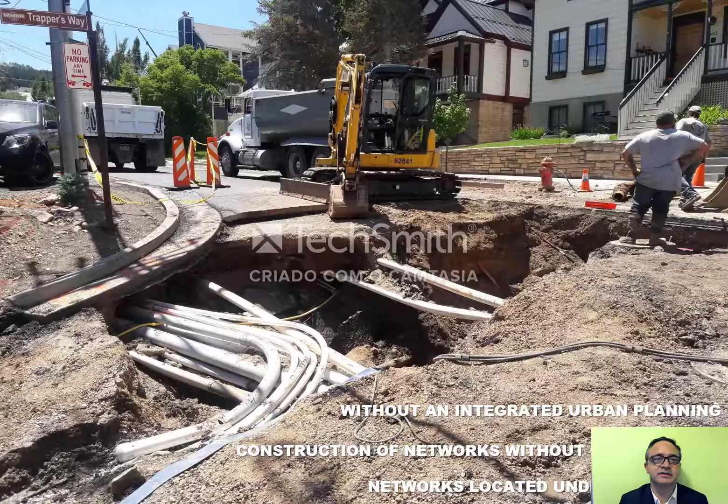The research motivation was based on the high cost of construction and maintenance of infrastructure networks, accidents, and the great environmental impacts caused by these works, mainly due to the implementation of networks under the streets, causing the demolition of the pavement to maintain the networks.

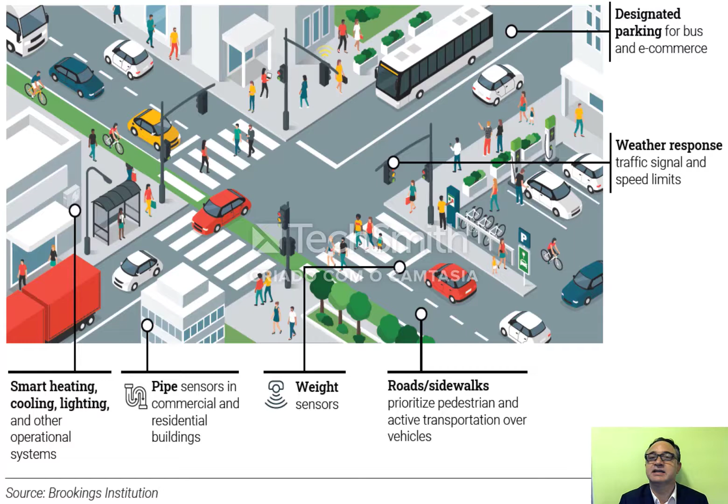Cities are growing and need more and more efficient, resilient, and sustainable infrastructure. Only in the United States, demand for infrastructure exceeds $2 trillion over the next 10 years.

But today, our infrastructure is designed and built without integrated planning. We have several problems with these systems around the world. Only in the United Kingdom, 7 billion pounds are lost every year in street works.

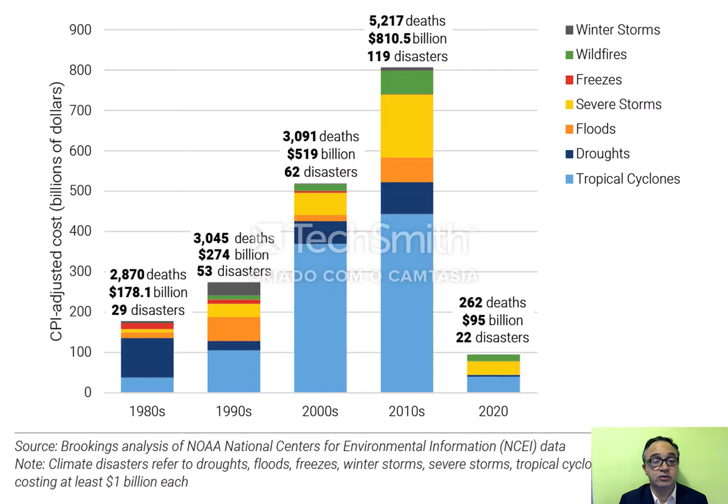We need to rebuild infrastructure. We propose for the 21st century a focus on integration, intelligence, and climate resilience in a multi-trillion-dollar infrastructure market.

Issues related to the COVID-19 pandemic changed the concepts, mainly of remote work and study, placing communication and energy networks as crucial for this moment.

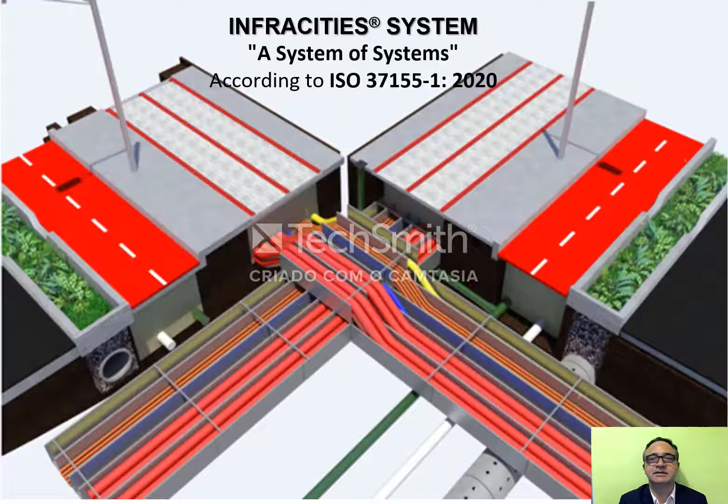So the solution is innovation, and I would like to present InfraCities System, formerly InfraDias, the next generation infrastructure and sustainable mobility for smart cities, the result of applied research in the area of sustainable infrastructure.

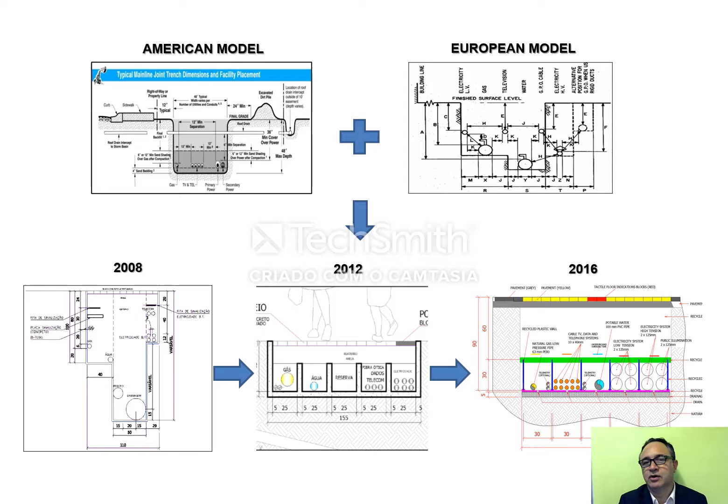The research started with the concept of urban infrastructure networks, developed using an American model during research at Texas A&M, and later a pilot project was built and tested in Brazil with the developed model called InfraCities, which will be presented now. InfraCities removes all facilities from under the streets and organizes natural gas, telecommunication, water, power lines, sewer, and drainage.

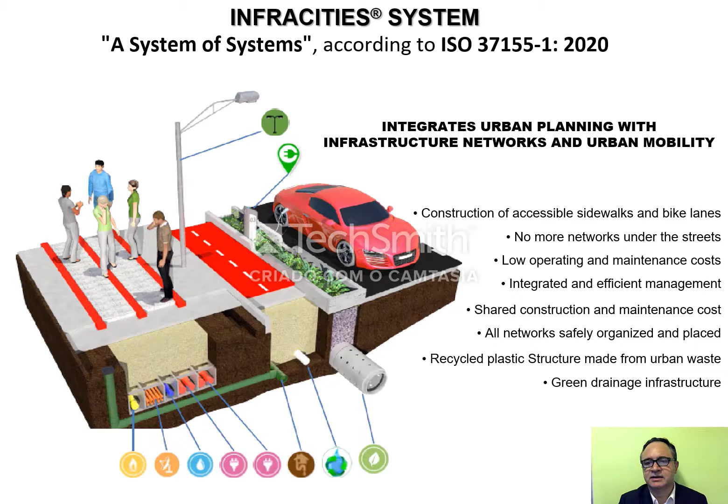These are placed under the sidewalks and bike lanes in a recycled plastic bay made from urban waste, in an efficient and safe system, transforming plastic waste into an efficient, safe, and sustainable infrastructure.

We built and tested a pilot project for 2 years in a technological park in Brazil with successful results, presenting a reduction in construction costs by 30% and a 70% reduction in maintenance and operation costs.

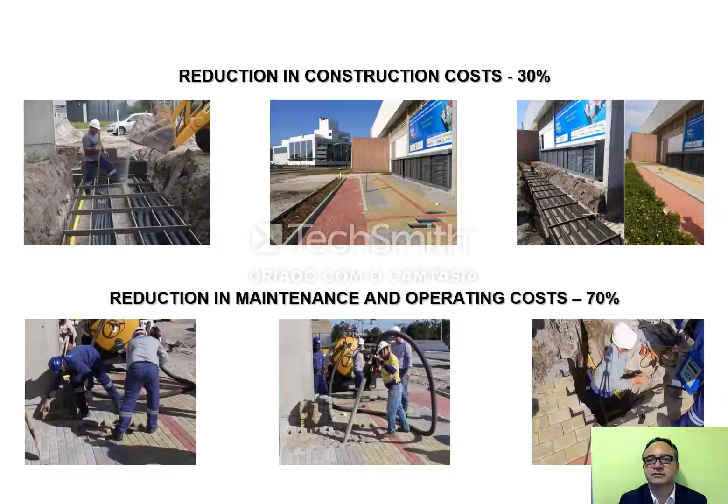The system was born integrated with BIM concepts, aiding the advent of a sustainable construction system for intelligent infrastructure, with the possibility of enabling BIM technologies for the next generation InfraCities digital twin, adding even more value to projects from its conception to its operational phase.

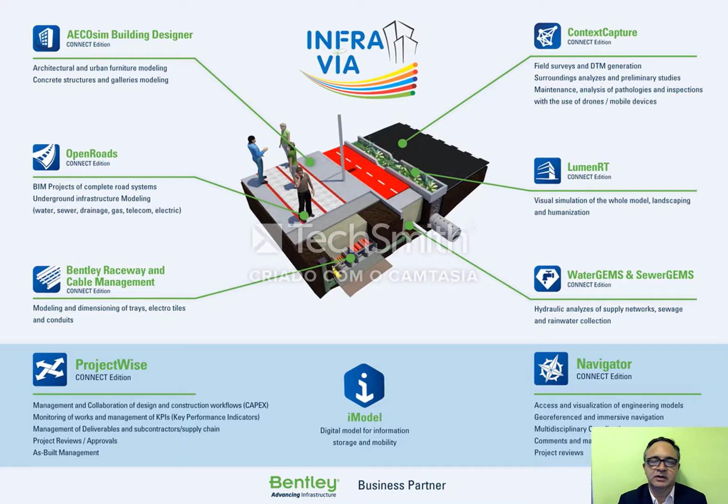It's important to show start to finish of this project. The construction process starts with the opening of a trench about 1 meter deep, and then we put sand and compact the ground with water.

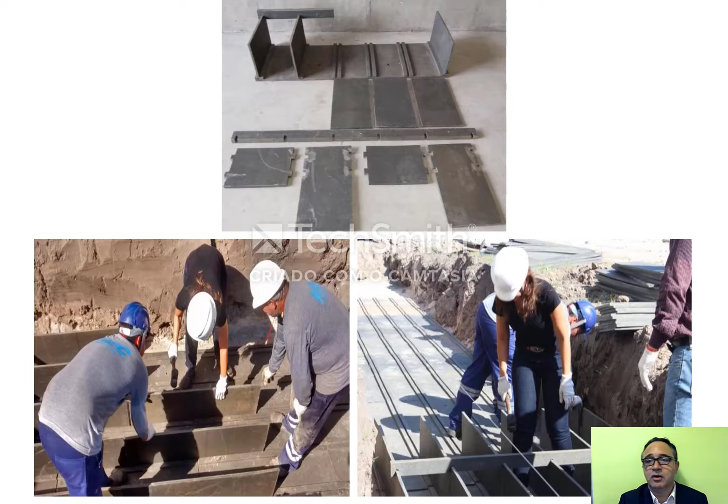Then comes the assembly of the plastic structure, which is all snap-on, not requiring special tools. Interconnection boxes for consumer networks are also easily and quickly fitted to the structure.

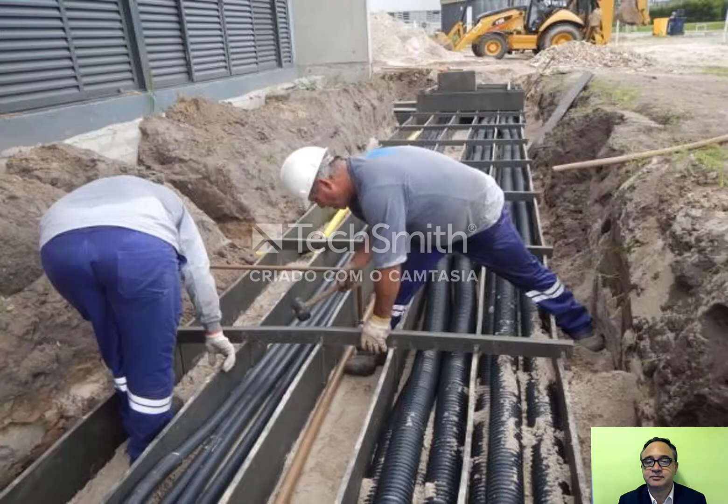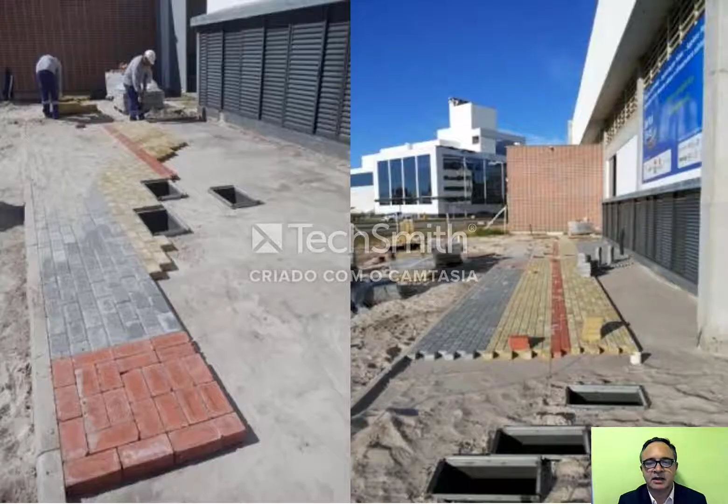This point is very important, especially for removal during maintenance. It's very easy to maintain this structure. The paving is done with interconnecting concrete blocks to facilitate future maintenance.

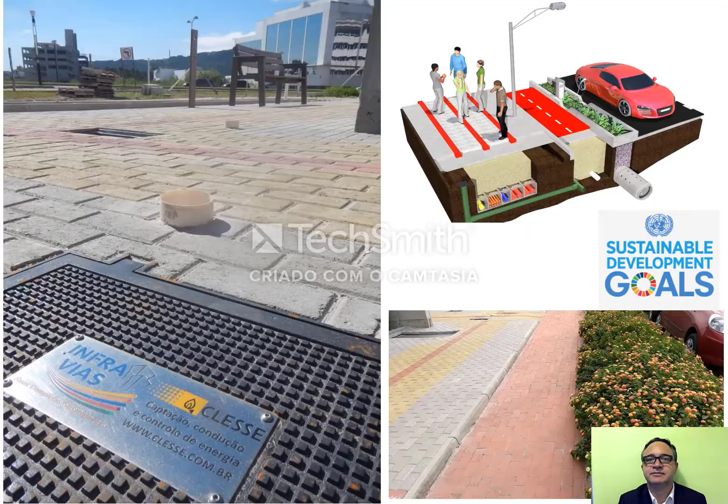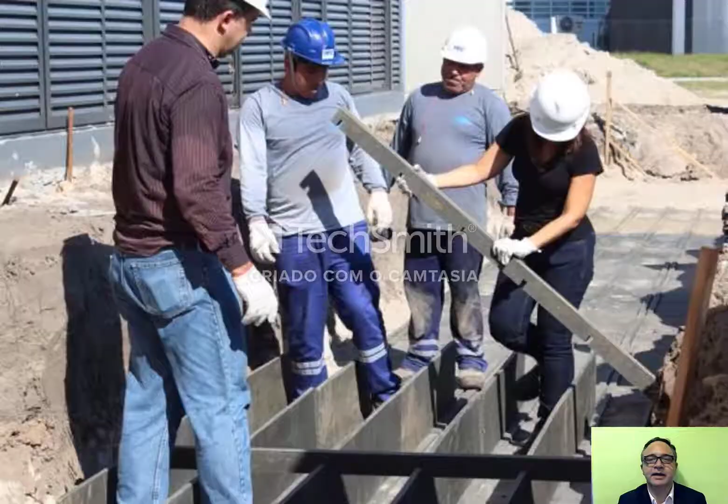The process presents a standardized, fast, and efficient construction in line with the United Nations Sustainable Development Goals, a very important point today. Without special construction equipment, it can be built in any city, on any road, of any size — for example, in downtown New York or in a small city here in Brazil or Asia — creating a global scale for this system.

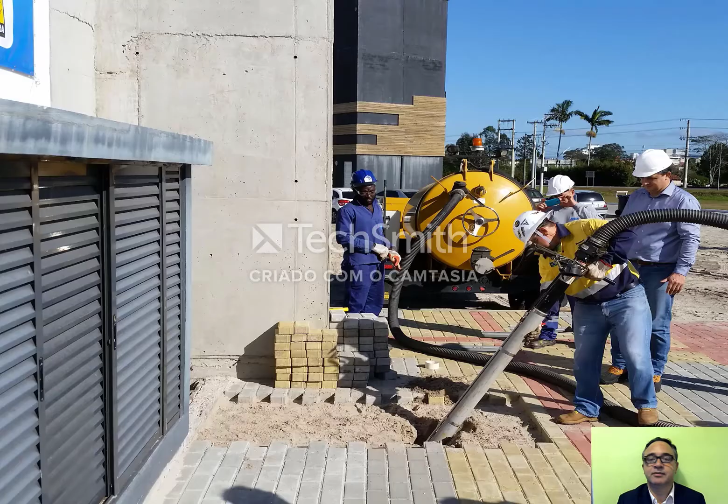To perform maintenance, it is only necessary to remove the interconnecting concrete blocks, remove the covering sand, and subsequently maintain the facilities. After the intervention on these networks, the same material can be reused, avoiding the generation of waste and the use of new materials. This is an important point for sustainability too.

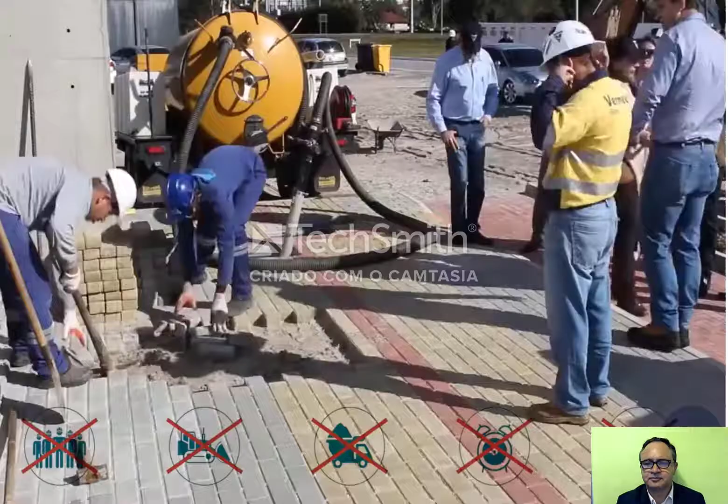It presents efficient and sustainable maintenance without demolition of the pavement of streets, no interruption of traffic, no generation of waste, and no new material consumption. This is a great benefit for nature.

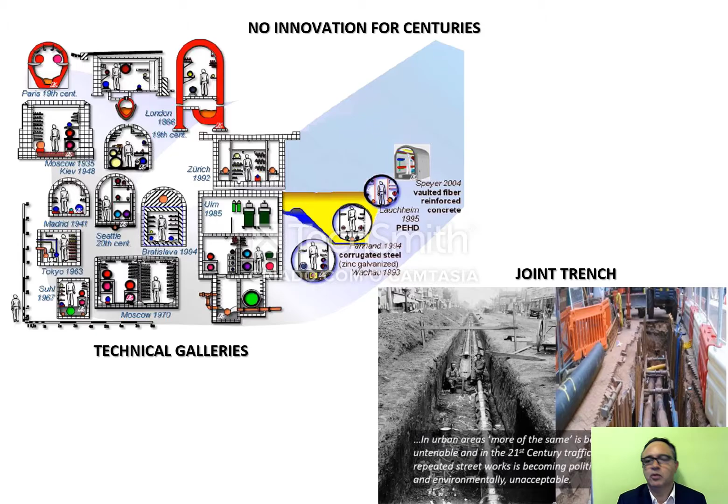The system presents great advantages when compared to technical galleries, which have high construction and operation costs, and joint trenches, which have low operational safety, in line with the most modern standards on sustainable infrastructure for smart cities — for example, ISO 37155, the framework for integration and operation of smart communities infrastructure.

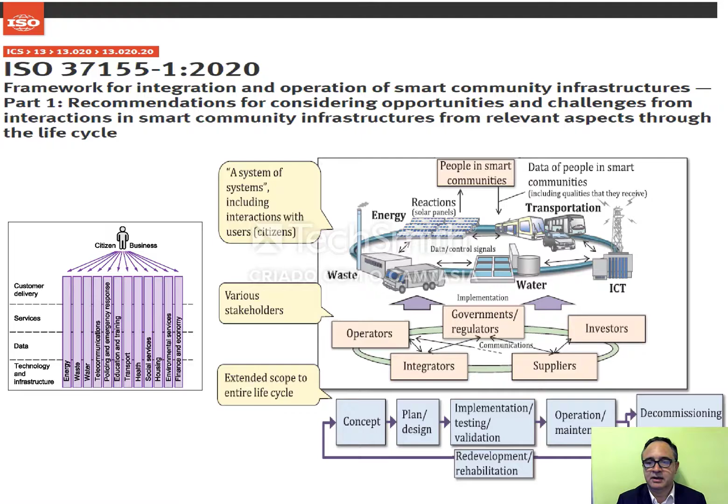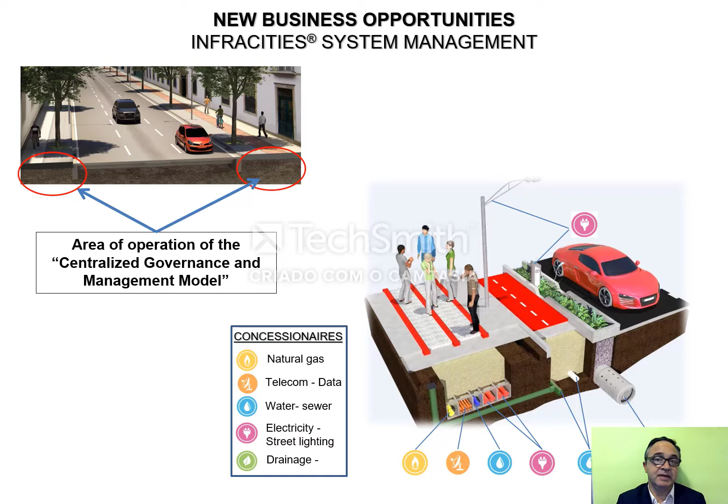This system can be used by both private investors who build residential, commercial, and industrial condominiums, as well as public authorities, such as for the revitalization of central areas. It offers the opportunity to share construction and maintenance costs between utilities, reducing costs to users while providing centralized management, including a business model with focus on PPP.

Today, the system was upgraded with the implementation of a drainage system integrated into the trench, and a new system for electrical charging integrated or incorporated into the lamp post.

The technology has been presented around the world at major events in the area, in South America, the United States, Europe, the Middle East, and Asia, and has received several international awards. We are working in partnership with several companies and institutions, creating opportunities for new business.

And I want to finish this presentation with a short video about the test performance in Sapiens Park in Brazil, to show in more detail all the phases.